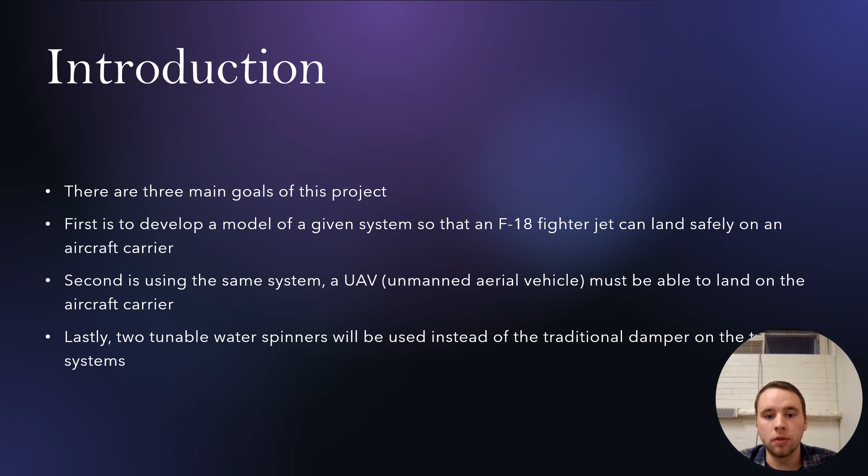Second is using that same system, a UAV must be landed, and then the results of that are going to be observed. And lastly, there's a new tunable water spinners that are being used to land the aircraft rather than the traditional dampers. Those water spinners will be used to land both the UAV and the fighter jet in this project.

So I started off the project by looking at the model of the system and then immediately seeing that there are 4 springs, 2 dampers, 5 masses, and 2 pulleys. The main thing is that they're all symmetric about a center axis that runs through and along the fighter jet, the exact center of the fighter jet.

The fighter jet itself weighs 20,000 kilograms and is landing at a speed of 64 meters per second. And the plane needs to stop before going off the edge of the aircraft carrier, which is 333 meters away from where it's landing. And then the pilot needs to survive as well, which is probably the most important part of this whole project, which means they can't experience a sustained G-force of 6 or more Gs.

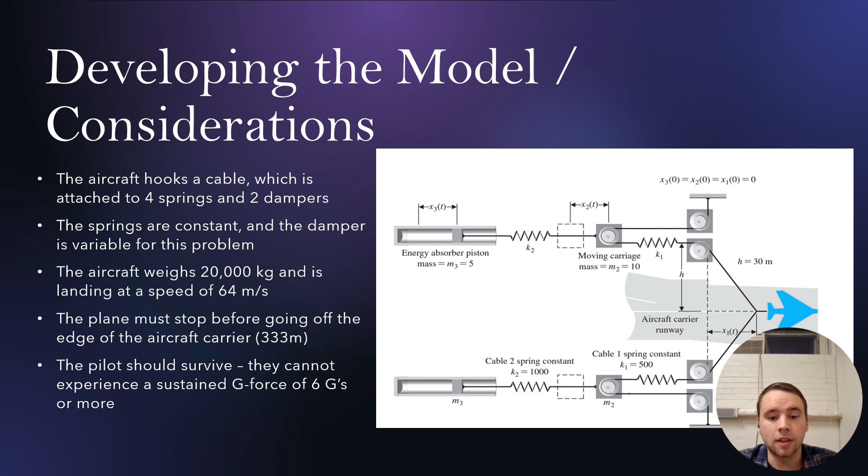And I'm assuming that this is an experienced fighter jet pilot. That's what I meant to say, sorry. Anything more than 6 Gs will kill them, probably.

So these are my free body diagrams for the 3 masses, as well as the equations of motion that go along with it. A couple of things to note here is that the constant for K1 is doubled due to the fact that there's a pulley. It just accounts for that. And because of that, the value for K1 pulling mass 2 is then halved to go back to its initial spring constant value. And that's just accounting for it in the equations, that 1/2.

And the angle between M1 and the rest of the system can be ignored because as mass 1 travels farther away, it gets closer and closer to 0. And then also the mass of the plane is halved in this case because of splitting the system in half. And that will stay as half the entire time.

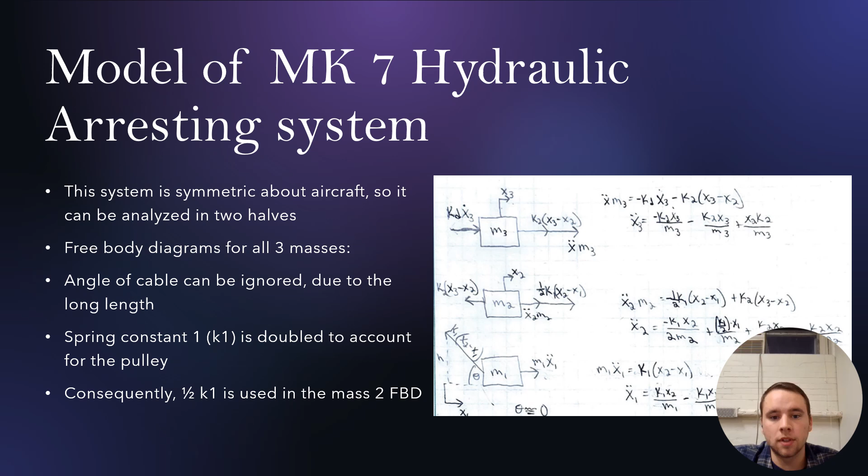Alright, so here is my state variables again, the full state space model. The free body diagram's on the last slide, but I have the state space variables listed out. And from there, I got the free body diagrams, then the equations of motion, and I plug those equations of motion into the differential equation x dot equals Ax plus Bu, and that is shown in matrix form in that picture there. And then the C matrix comes from the equation y equals Cx plus Du, I believe.

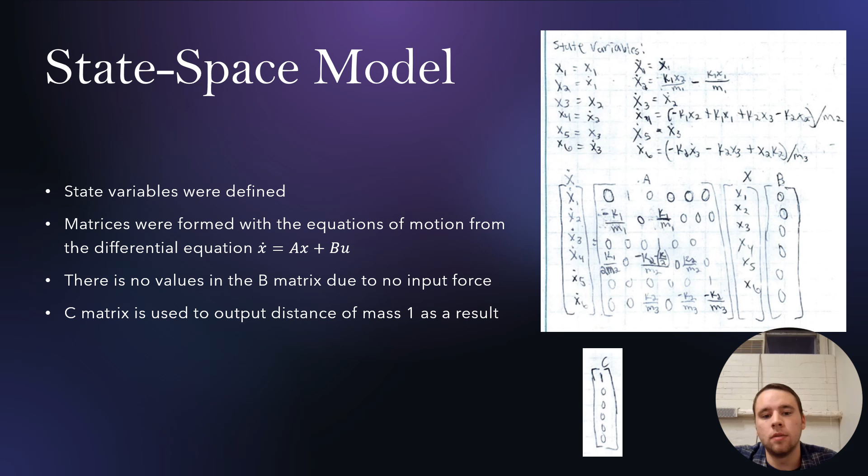And that C matrix is just outputting the distance mass 1 travels, or x1 as I define it. And then the B matrix is zeros. There's no B matrix because there's no input force being applied to the jet.

Alright, and then this is my Simulink model for the entire system. The entire project, actually, all 3 parts. It doesn't change. It's just a simple state space, and my matrices are defined within that state space function, and then you take the first and second derivatives to find the velocity and acceleration graphs respectively, and that gain in there is just 1 over gravity, and it's just allowing me to get a graph of g-force versus time, which is a bit easier to read than acceleration. And then the out.simout is just exporting the data into Excel.

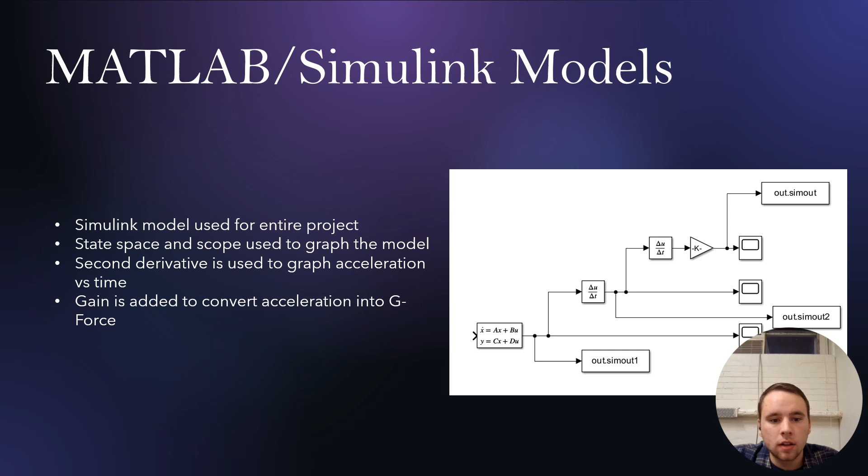So here are the actual results that I got when I ran part 1 of this project. So when I set the dampening constant to a value of 1,300 kilograms per second, the max displacement of the fighter jet was 321 meters. You can see in the graph there it goes up to about 321 meters and then comes back down to around 240, maybe 235, and then evens out at around just below 250 meters.

This is great because it doesn't oscillate off the aircraft, and as you can see in the G-force graph, the pilot does survive. The max sustained G-force is around 1.2 Gs, but there is an instantaneous G-force of about 6.2 Gs, and that is fine because it's completely instantaneous, so the pilot should survive.

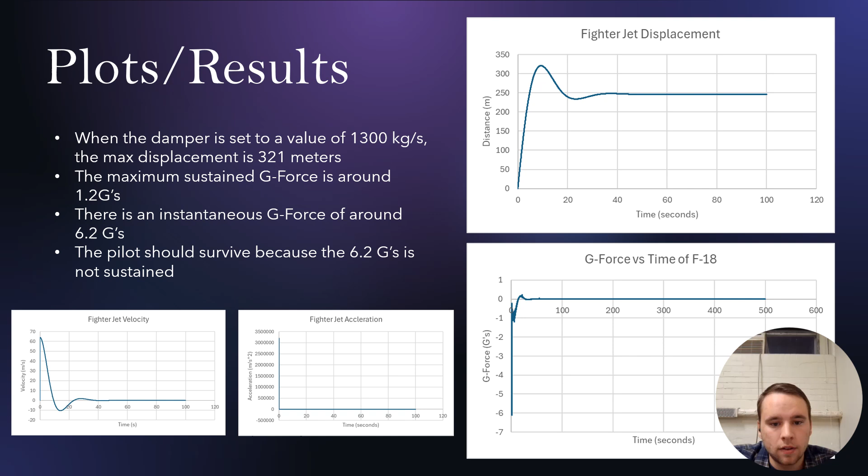Alright, so part 2 of the project was landing the UAV with that exact same system. So nothing changed, the dampening constant is still the same. What did change is the mass of the UAV is 550 kilograms. I should say mass, not weight. And the velocity is 35 meters per second. Then also there is no pilot in the UAVs, so we don't care about the G-force that it sustains.

And while doing this, the max displacement of the UAV is under 25 meters, so it stops really fast, but the cable actually is going to pull that UAV back beyond the initial place where it landed. So if it lands at the edge of the aircraft carrier and it looks like it's being pulled back around 12 meters beyond that, that could very well be in the ocean. I don't know if these pilots are landing right on the edge of the aircraft or not. I'm going to assume they are and that they can't travel back.

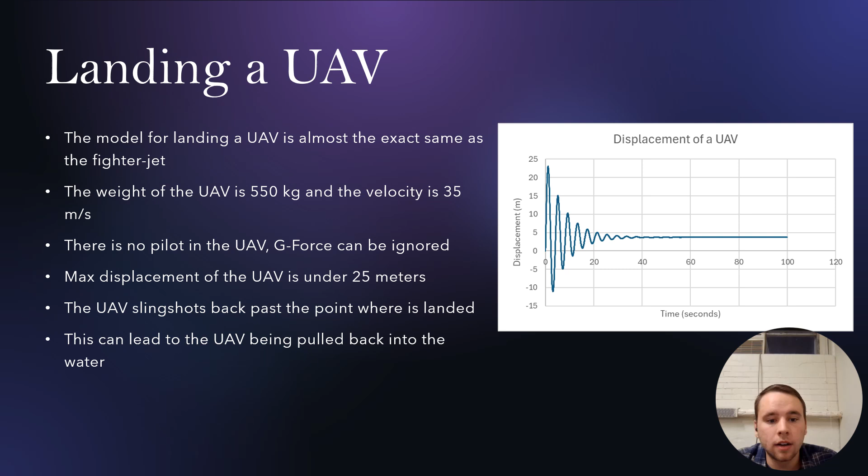So that is a problem. So this UAV with this system would be in the water if it landed. I guess it would land and then go back into the water. But yeah.

Alright, so then the AAG system with the 2 tunable water spinners. So with this, nothing really changed in terms of the model. The dampening constant changed to account for these 2 water spinners, and these 2 water spinners can vary the distance they are apart, and that distance then correlates to how much the system will damp.